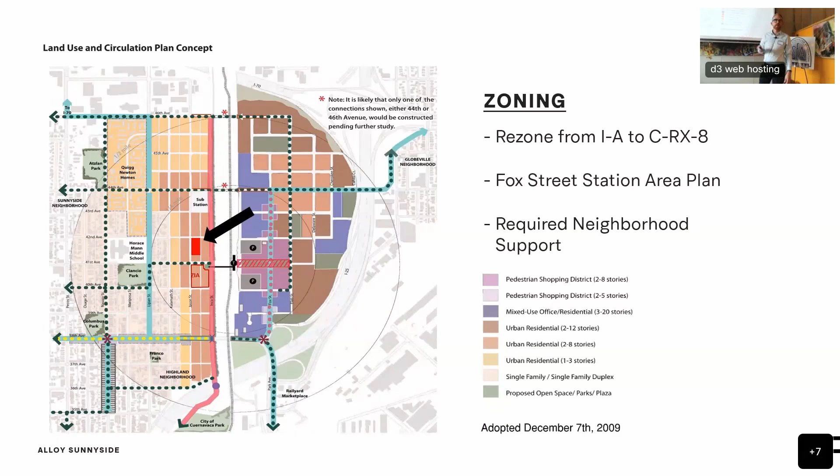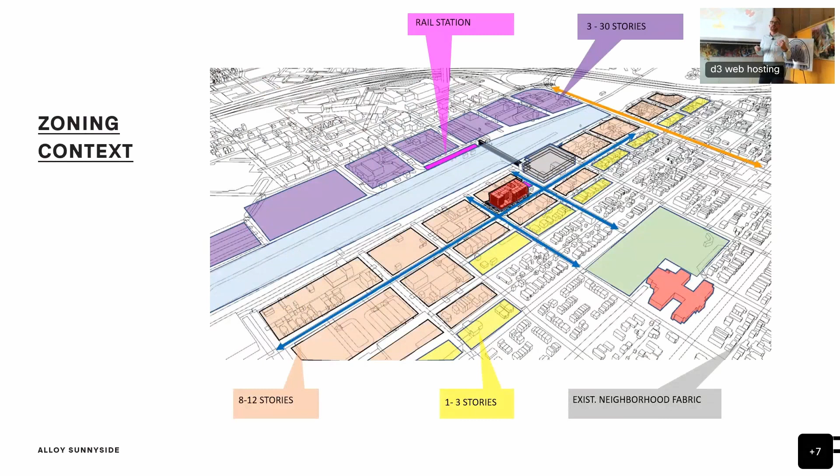This area hasn't been zoned, so each project has to be rezoned, and to be rezoned, they have to get the support of the community. I don't know if you were part of the community organization at that time, but we met with the community and heard what their concerns were about the location.

One of the primary things the community was really interested in was the connection to the commuter rail stop and providing a safe streetscape and paths to that location. They were also concerned about transportation, the amount of cars these buildings would bring to the site, and I'll touch on that in a moment.

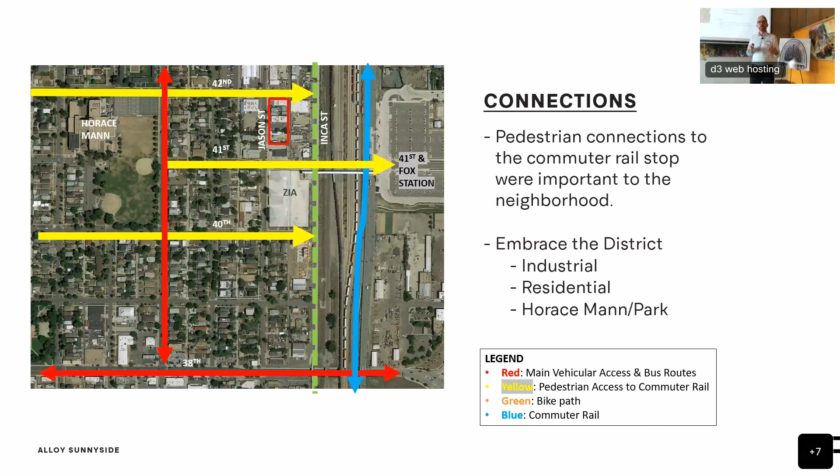They were also concerned that it would fit within the character of the neighborhood. As you can see, a lot of it is single family homes, so it's hard to match that, but there are industrial zones further north and along the tracks, so we looked at ways we could pick up some of those characteristics.

In the project, we pointed out that we can't affect the rest of the street, but we have this part of the block that we can actually influence.

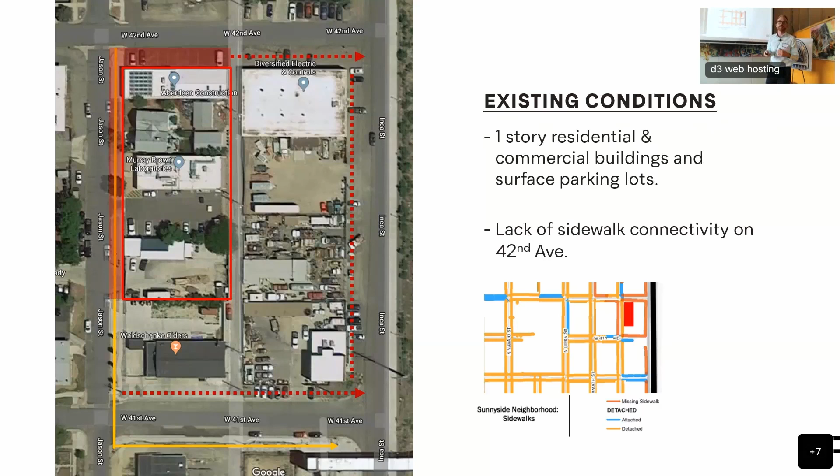Before I get into that, the client came to us with this program saying they want to do a mixed use multifamily building somewhere around 209 units, and they want it to include retail space.

Part of the community organization really wanted to create a sort of main street, not just all residential buildings. They wanted small shops, mom and pop restaurants, things like that. So Prime West was looking at how they could incorporate that into the building to be responsive to the neighborhood.

Another aspect of that responsibility is the 10% affordability. A lot of these multifamily housing projects, I think the laws have changed a bit now, you used to either pay an affordable housing fee or actually build the affordable housing. Our client went above and beyond. They technically could have only built maybe 2% affordable housing, but they wanted the support of the neighborhood, so they incorporated 10% affordable housing to be able to get the density and height they were petitioning the neighborhood for.

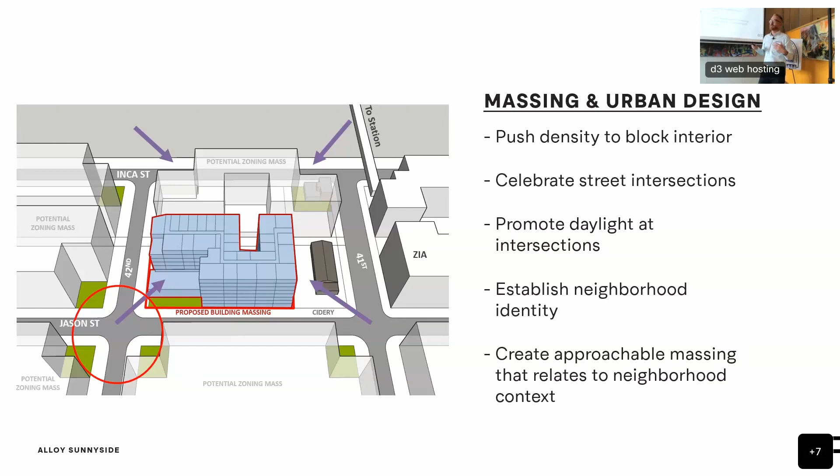We looked at the cidery next door that's not going to be redeveloped for probably another 10 years, so we thought, what if we pulled back from this corner and pushed the mass of the building more towards the middle of the site, providing some better breathing room to create potential for a different neighborhood characteristic as this area redevelops.

Part of that was to allow daylight to get to that streetscape, creating a more pleasant, safe environment for people as they moved along the street to the commuter rail stop.

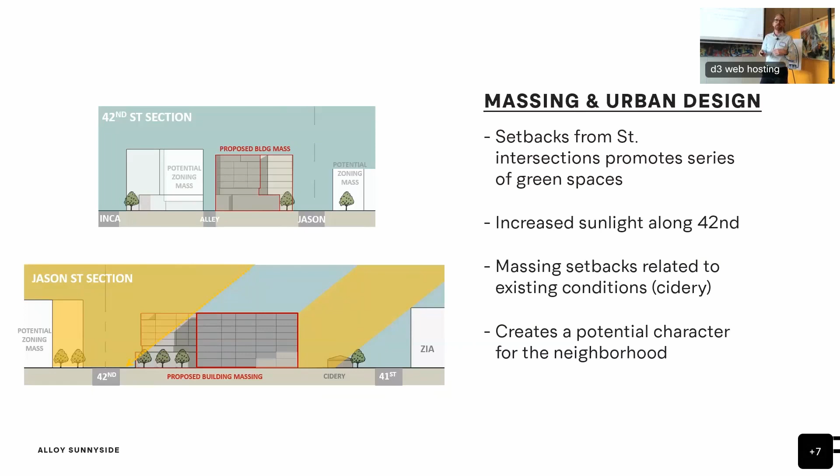And then also just looking at how does this massing start to affect the character of what's developed in this area. And then we went around the neighborhood, looked at what are the kind of defining characteristics of Sunnyside and how do we start to incorporate that into the building. And then just also materiality.

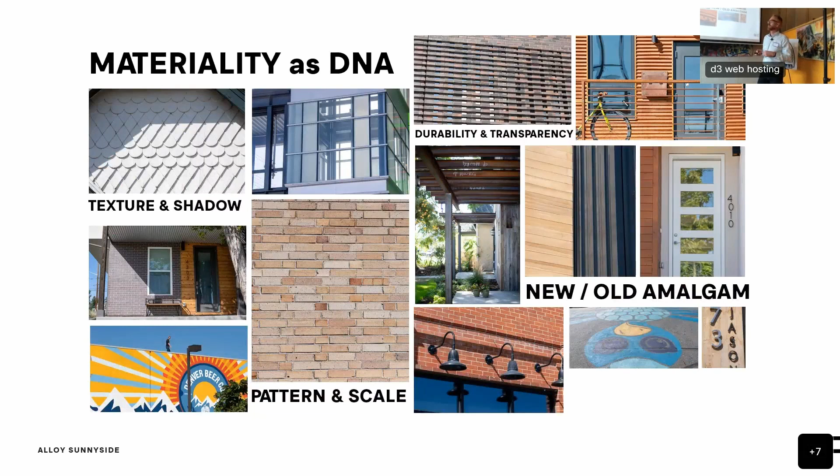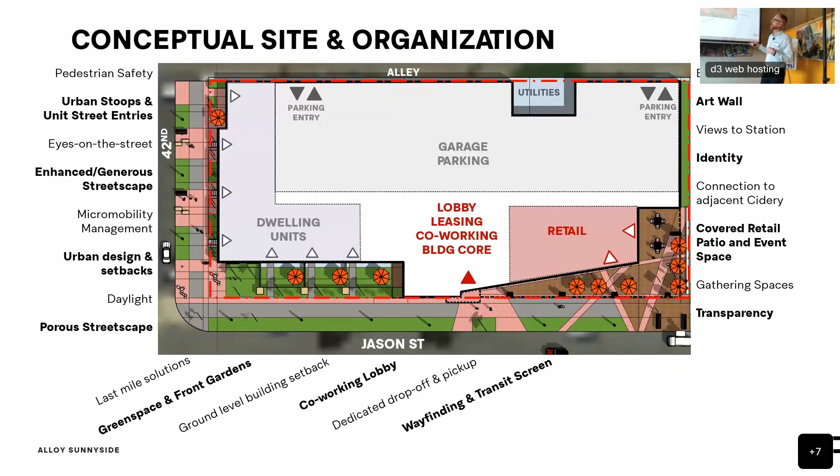We looked at incorporating the retail on this corner, so there is a kind of synergy with the cidery that was next door, and visibility to the light rail, pedestrian bridge and overpass. And then incorporating residential units on the ground floor that would have stoops and interface with that streetscape to put eyes on the street, make it more safe for pedestrians as they're navigating through the site. And then pushing the main building entrance more towards the middle of the block.

And so this was the initial kind of conceptual design for the building. You'll notice the very flat site at this stage of the project, and that'll be a key aspect of the structure of the building and how that played out long term. But then the ground level here was picking up cues from the elementary school Horace Mann down the street, and then trying to pick up some aspects of the industrial nature of the area and incorporate that brick.

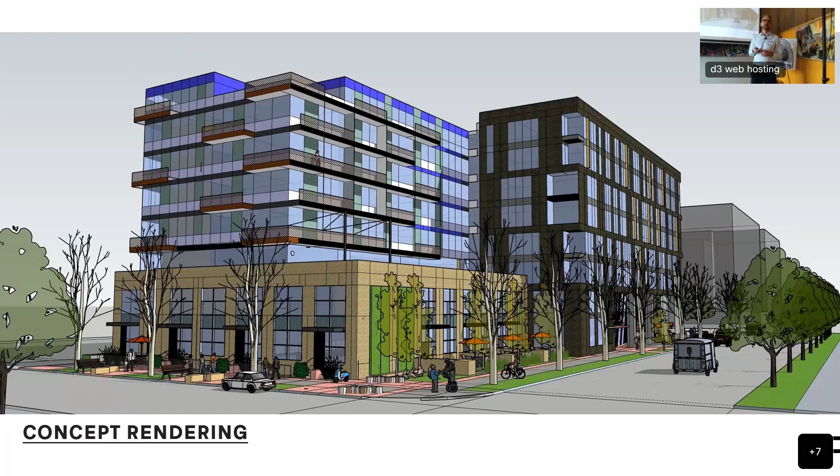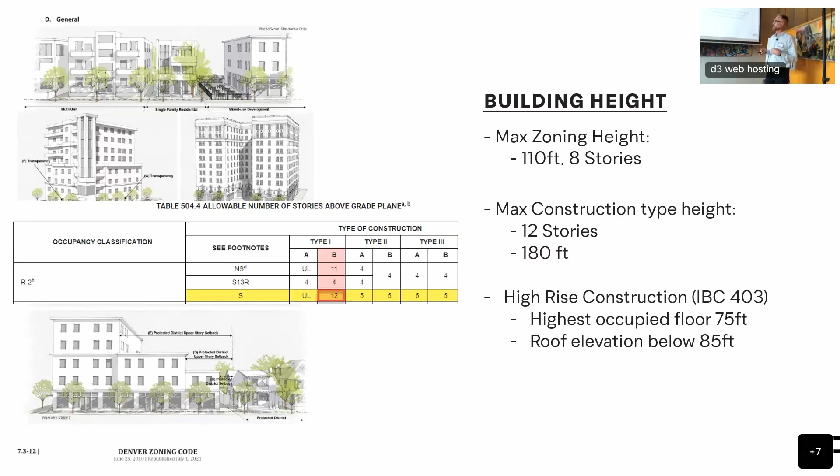And so looking at that program, we started going through the zoning. They wanted it rezoned to CRX 8, which allows 110 feet height and up to 8 stories. When you get into the actual code, that doesn't quite translate. And so we went under the type 1B construction because that gave us the height that we could build that 8-story building that we were initially looking at. And then looking at the construction type, the allowable feet above grade plane.

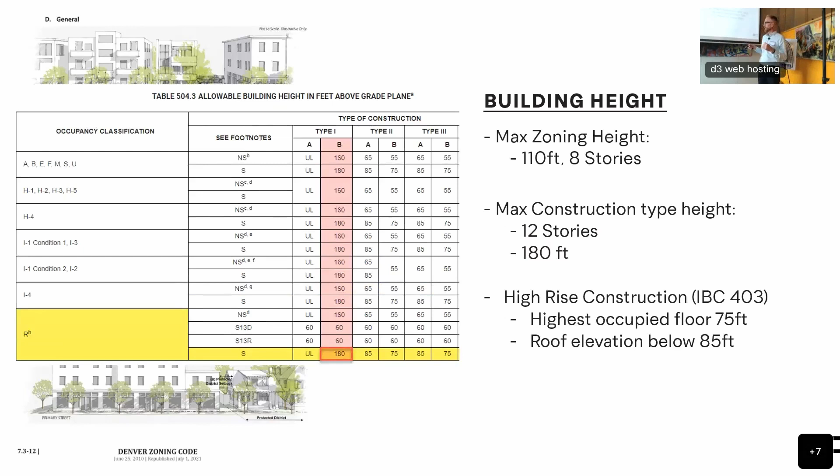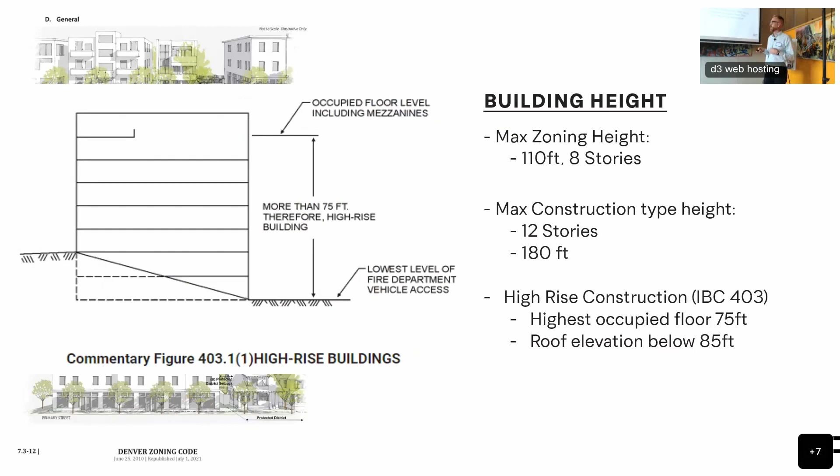And so there was that aspect, but then as we started digging into it, there was also this concern about, well, we don't really want to go to high rise because that triggers a bunch of other aspects that were going to be difficult to accommodate on the site. And so remember this diagram because that'll come into play here in a second.

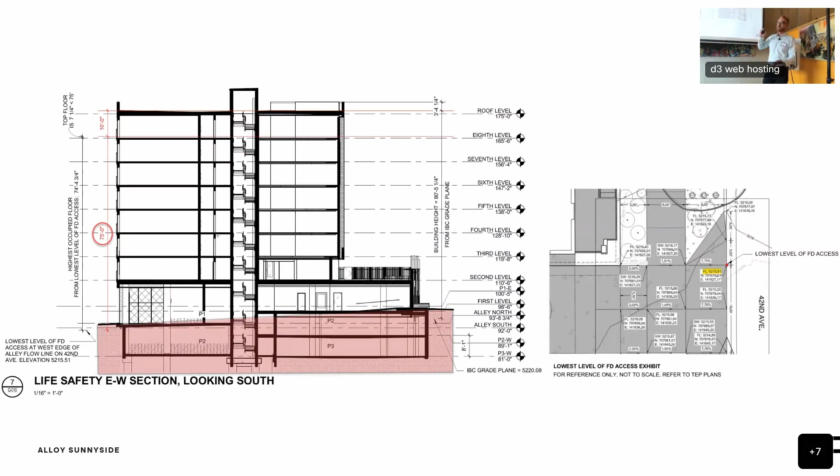So as we started designing and got the survey info, we realized there's about 10 feet of fall from Jason Street to the alley. When you look at fire code, the building becomes measured from the lowest point of fire department access, and so that was from the alley. And so we essentially lost a floor of the building. And what that ended up doing was pushing the building down and tightening the floor to floor.

Let me back up here for a second. We looked at going to high rise, but you have to have access to 2 separate water mains. And then you have to incorporate pressurization, elevator lobbies, fire command control center. And because we're already squeezing the building so much, there just wasn't that space in the project to allow the pro forma to kind of eat up that square footage.

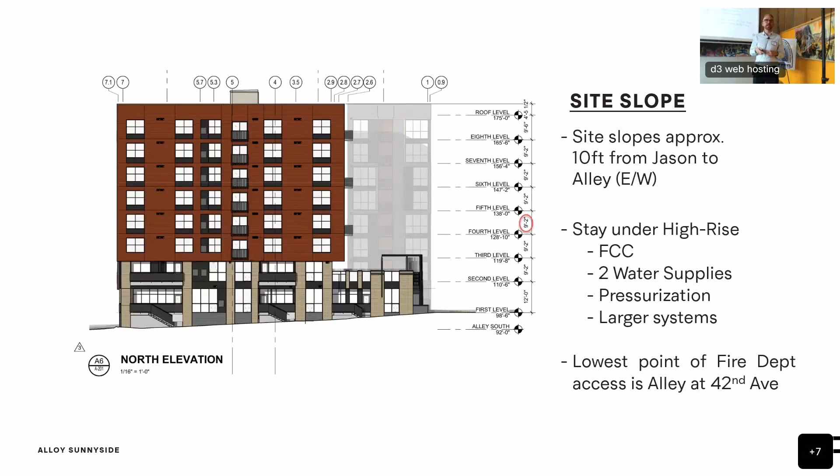Another aspect that was pushing on the building from the other direction was the below grade conditions. So as we were working through the design in concert with Catamount, they were pointing out, hey, there's a lot of bedrock there. It falls off on the south end of the site. It'd be great if you could flip your parking garage, get the deeper end on that side, and try to get out of the bedrock as much as possible.

And then also you see there's groundwater here, and we had to incorporate an under drain system, which if you had to deal with that on any project like this, a lot of different things come into play with those under drain systems, where if you pump that outside or daylight it, then you have to treat it, all sorts of things according to the health department. And because water in this area will most likely have some arsenic in it and different things like that, it was almost a given that we'd have to treat it.

In this case, however, because the ground bedrock fell off on that south end of the building, we're able to incorporate an under drain system that would capture any water coming from the north end that was a higher elevation and run it kind of around the building to this point to a dry well and release it back underground. And so then we wouldn't have to treat it. And then Lauren can touch on a little bit of how that affected some of the structural design for that bottom slab there.

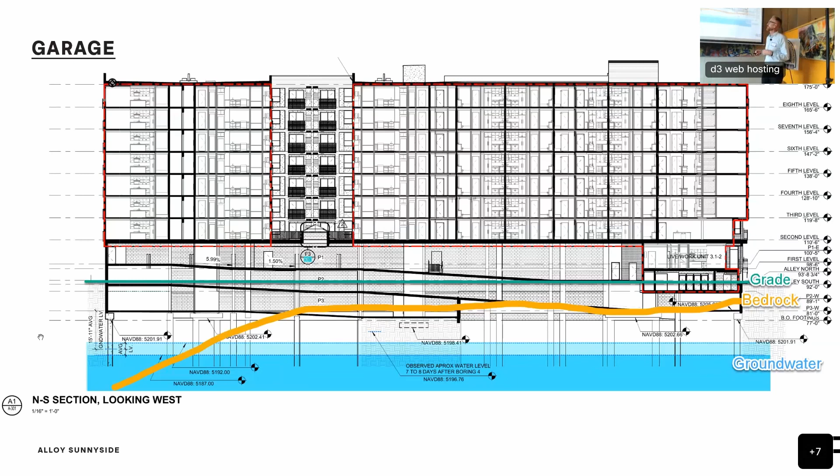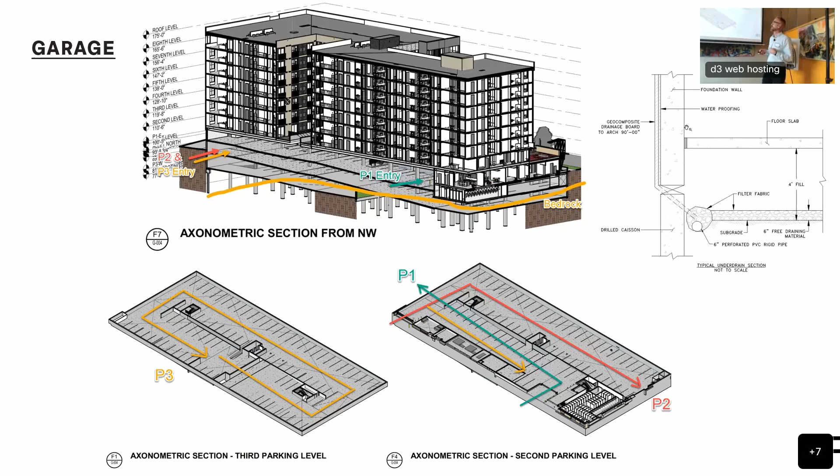Another challenging aspect, because we had to flip that garage, we ended up getting a very complicated parking plate. And so you'll see this on the site tour. On the north end of the site, there's an entrance to kind of the upper level parking that dead ends. On the south side of the site, there's another entrance that goes to a dead end second level, and then another leg that comes down and deeper to the lowest level of the parking deck there. We joked navigating the site that it ends up starting to feel a little bit like MC Escher's staircase down there.

I did drop in this diagram here of that under drain system and how we're picking up any sort of flows of groundwater that come against that parking garage wall, capturing that, running it down to that under drain system, and then again to that dry well at the corner of the site.

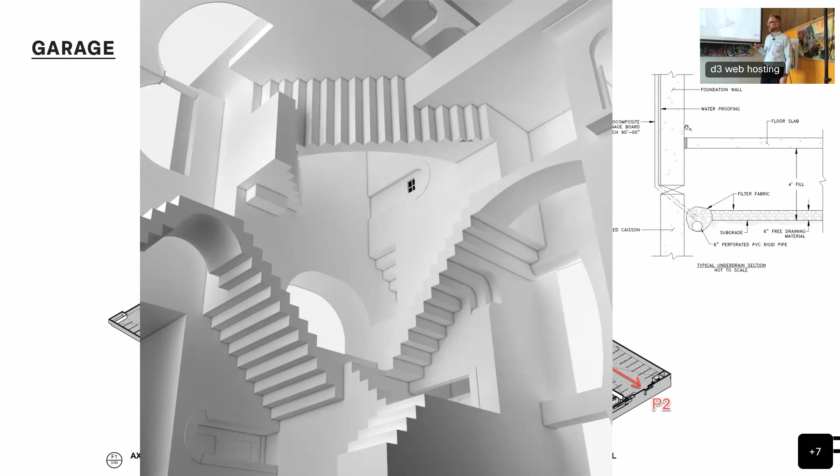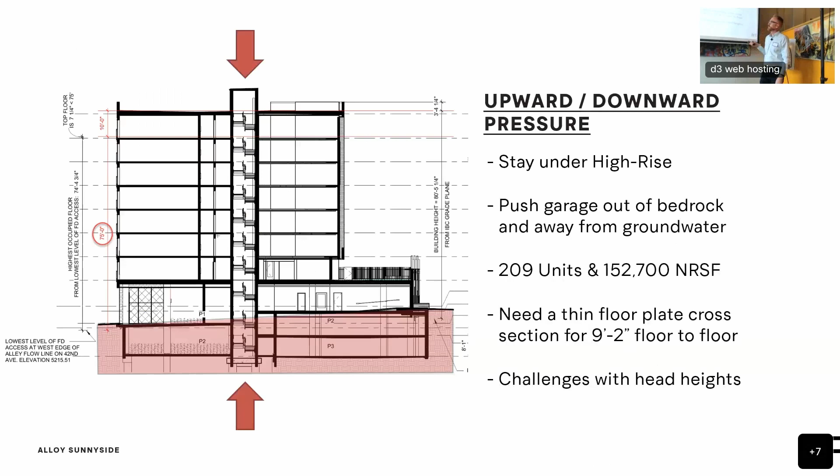So we had these two pressures pushing on that building, and that really started to tighten that floor to floor. We ended up with a floor to floor of 9 foot 2 inches. And so then that started really locking in what sort of structural system we could use for these decks in the building. And so here's a cross section of that. It's a 5.5 inch Infinity floor. It's an Epicore deck. Lauren can get into maybe more of the specifics of that. And then we had to do a bunch of acoustical components to this to keep that cross section just as thin as possible. And so these units end up with 8.5 foot tall ceilings.

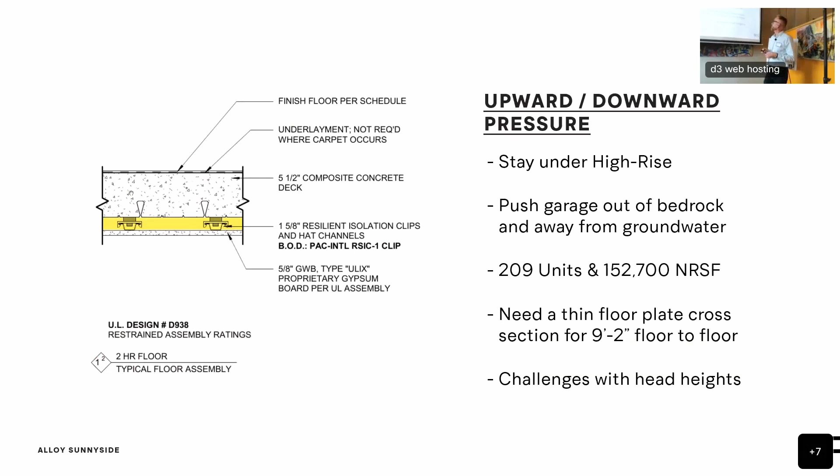A few other interesting aspects of this type of construction, if you're not aware, because we're in the 1B category, that means our structure has to be rated 2 hours. One thing that if you work with architects doing this type of construction, they're probably always hounding you on, okay, what is the primary structural frame? Because as an architect, I have to rate that individually from the wall. So if you have a column in a 2-hour wall, I still have to rate that column separately in a 2-hour configuration.

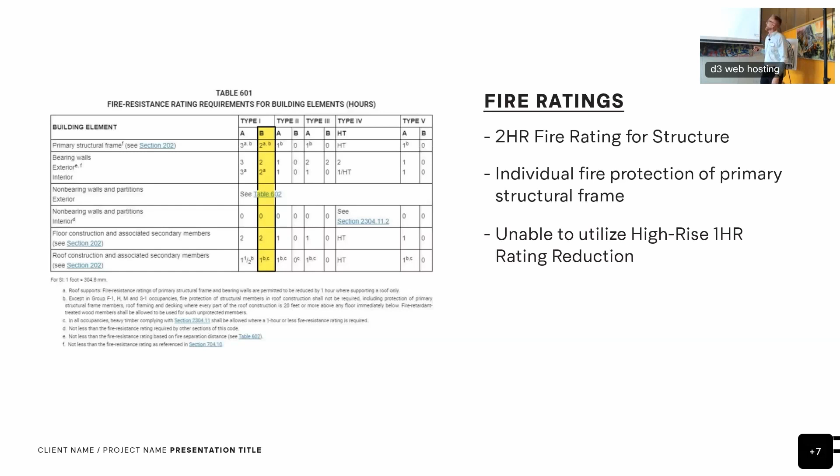Because we weren't high rise in a lot of these Infinity type buildings, you can get a reduction to drop down to type 2 or 2A construction. So then all your ratings are 1 hour. It becomes a little bit easier. With the 2-hour, well, let me back up just a second. So here you can kind of see some of the configuration. And so we get all the load bearing, these light gauge metal stud panelized system. These walls are what is the load bearing structure of the building.

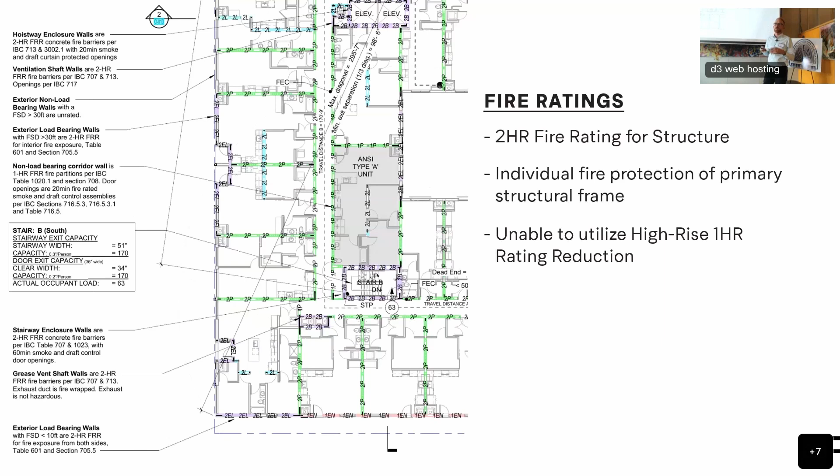We do have some conditions where, like at balcony locations, especially on the north end of the building, you'll see we had to incorporate a lot of steel columns just to get some of the building configuration that we were wanting to achieve there. But here you can see the 2-hour ratings for those load-bearing walls, and then the non-load-bearing walls within the units. There are some locations where there are load-bearing walls inside that unit, and so there gets to be some complicated UL assemblies and ratings.

One aspect on the exterior walls, also because we're building to the property lines of the site, you end up with different conditions where, like on the south side of the building, because you're so close to the property line, you have to rate that exterior wall that's load bearing 2 hours from both directions. And that equated to 2 layers of sheathing on the exterior. Other locations just had 1 layer.

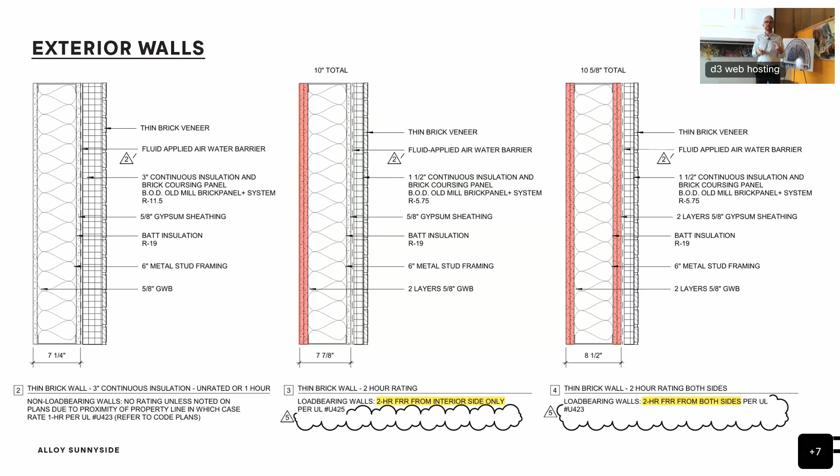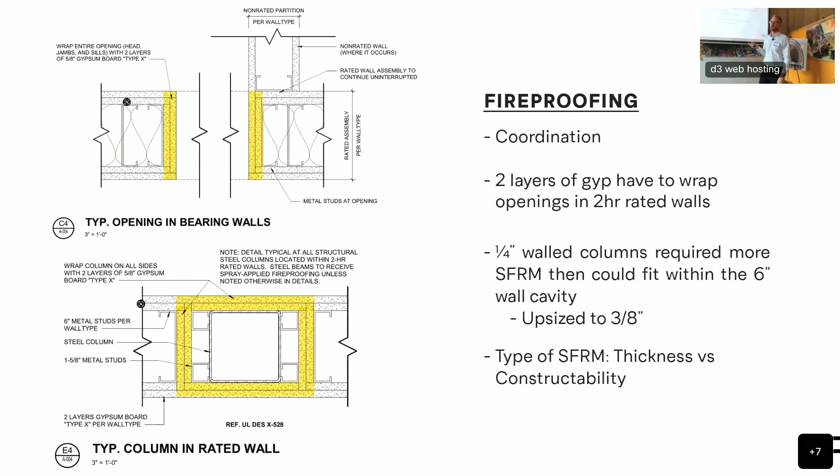And so it ends up being this coordination thing between the structural engineer, where that slab edge is, the shops, and the GC. There's a lot of things to be aware of as you go through that. And then again, that kind of condition where you have any primary structure, it has to be 2-hour rated. And so if this was occurring in a wall, then we have to either spray fireproof that if the column is small enough within that wall cavity, or if it's larger, then we could incorporate a gyp wrap around that.

And then just real briefly, this is the current configuration of the building. You'll see this as we get out there. This is 42nd, and then this is Jason. All the amenity space for the building, the leasing operations, co-working, the retail bay at the corner of the building, and then live work units along the street on the north side.

And then at the upper levels, this is the typical floor plate. It's pretty much all 2 bedrooms, 1 bedrooms, and some studios. We do have 3 bedrooms. There's one on the 2nd floor, and then the ground level, all those units are 3 bedrooms as well. And the building configuration is that kind of S shape. And so this is where we step back from the corner. That's where we get some interesting things you'll see in the podium out there as well, related to getting a pool hovering above a unit with a spa.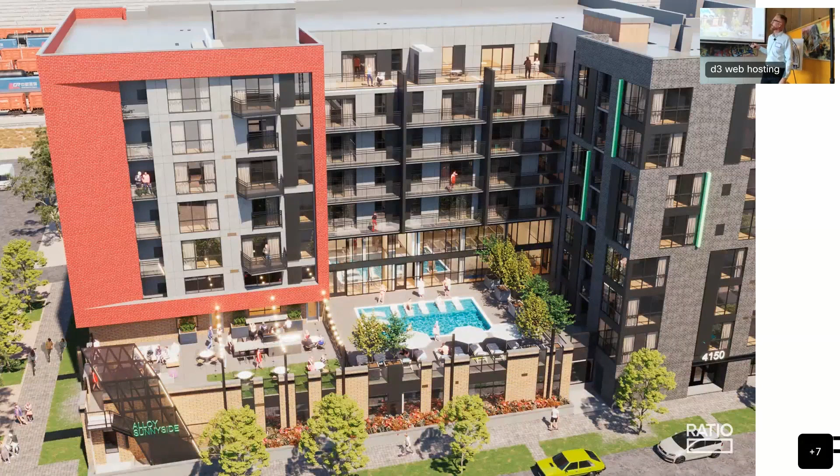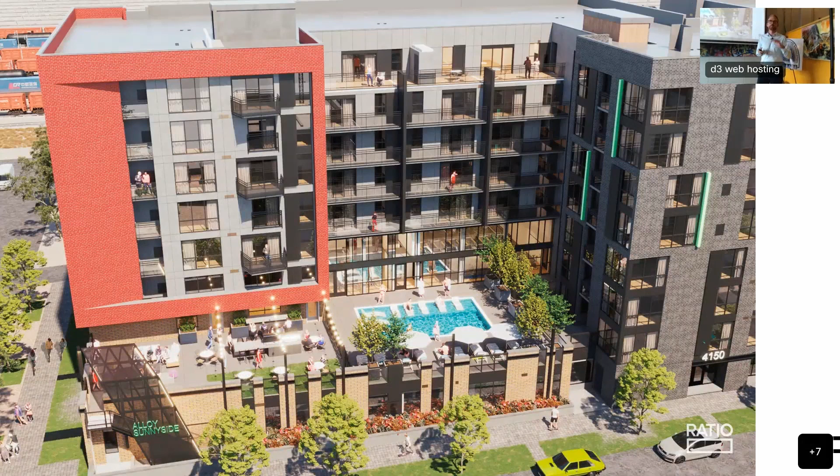You'll see we've got some exterior lighting that will be incorporated on the building. Looking at that pool deck here, you can see kind of that configuration of what that ultimately will look like. The units up here, we have a continuous balcony along those faces there. And I don't know if we should be able to see some of the form work on the underside of that, where we incorporated a drip edge to make sure that that water's not running back to the building, and create a place to stop the traffic coating to ultimately protect the rebar and stuff in these slabs.

Then one last image. This is the cidery. You have a double height retail space on the end. A little fun tidbit with the fire code, you can only have so much open area, and so we had to work with the design to limit how much opening we had to the south of the building. So with that, I will pass it over to Lauren.

All right, can you hear me? I'm Lauren. I'm with IMEG. I'm the structural engineer on the project. And for those of you familiar, this is the RAM model for our project if you use RAM structural systems software.

One of the things that we did with this building was actually fully model the structure to be able to get the design loads at the podium level, at this level. And here's the pool Eric was talking about. There's some amenity space indoors here. There's the double height entry lobby and retail that Eric was talking about. And then hard to tell from this, but this is the end where those ground level units are, and the site is sloping as you go from Jason back to the alley.

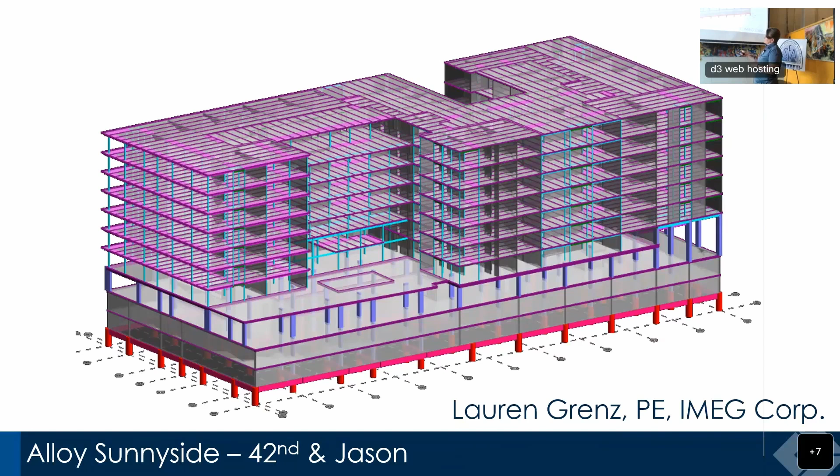So just the systems in the building, because of that building height and the short floor to floor, we're using an MSR deck and what's commonly known as an Epicore system or an Infinity system. If you've heard of Infinity, they provide load-bearing metal stud walls that are panelized. So we were able to keep the structural depth at the upper levels between 5.5 and 7 inches in almost every location. So our total structure depth was this deep throughout the upper levels. That really allowed them to give space to get the other items that they needed into the units and to get that acoustical component.

Below that, we had a podium slab, and that's mildly reinforced, and a level 1 slab at the street level that's also mildly reinforced. Part of the reason for the mild slab rather than post-tensioned was some of the street sloping and the stepping in and out of the building at that ground level. So we needed flexibility at the first level to make any steps occur, add anything for ramps and pavement and things like that. I'll highlight that in our plan a little bit later.

We were able to use post-tension slabs at the garage, which turned out to be a 7-inch structure depth as well. Again, that helped us keep that bottom level up. We weren't at this deep of a structure depth throughout the garage levels.

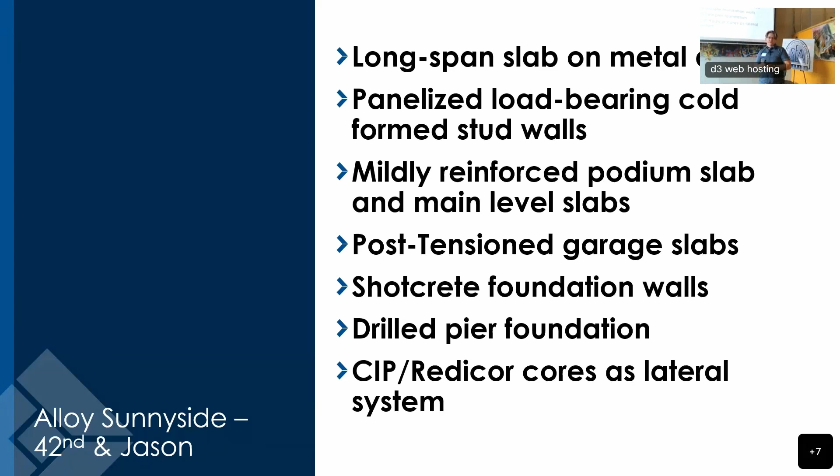Here's some pictures of the structural system. One of the benefits of the Infinity style system is that Infinity panelizes everything. So most of the construction of the structure, once you get up above the podium level, is all panelized. They just drop it into place, attach it, go to the next one. Drop it into place, attach it. That helps your construction schedule as well.

Here's a picture at one of the stair cores. You can see the metal deck coming in, attaching to the Redicor system, and then a little bit of structural steel in this particular location to get that bearing line right at that core line. Here's a view of the front edge that Eric was talking about, at the back by the tower crane, overlooking where that big skylight would be that Eric mentioned.

This is what the metal deck looks like. You'll notice that it's a very tall profile, about a 2-inch profile. At every bearing line, they crimp it down. What that does is help the concrete provide an interlock right at that location so that your metal deck at the bearing line doesn't try to separate from the concrete.

And then one final structural piece is you have something called slab beams in this type of a system. Again, that's a 5.5 to 7-inch beam that acts as a bearing line where you don't have bearing walls in the units or where you have some kind of a transfer happening.

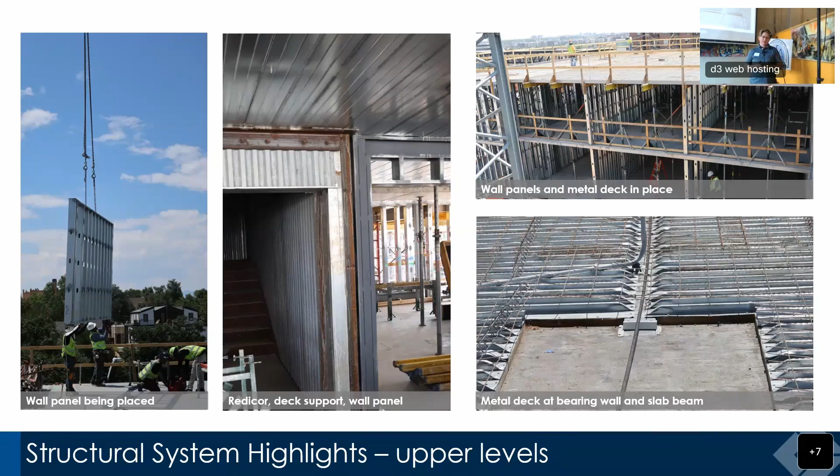So this is our typical upper level floor plan. You can see that the structural lines are very simple. This is the demising walls. We're able to clear span across the unit. I think the widest unit was probably around 21 feet, and we're still able to do that with that 5.5-inch profile. As you come around the building, these are the slab beams that I was talking about.

So we have metal deck spanning in this direction, and we had a structural steel column here that goes to an Infinity panel here, and a slab beam in the middle of that unit. I think it happens that there's a kitchen or a living room right at that location, so we didn't have a bearing line. And then right at the north end of the building, you can see that almost all the structure is actually that slab beam and column system.

Part of that has to do with the ground level where they have those stoops and they wanted to create a little bit of space along the sidewalk. They actually moved the exterior wall of the building in by about 2.5 feet, which meant that all of our load-bearing walls above would have been outside of the structure on the ground level. So we ended up going with this type of a system with the slab beams instead of the load-bearing walls.

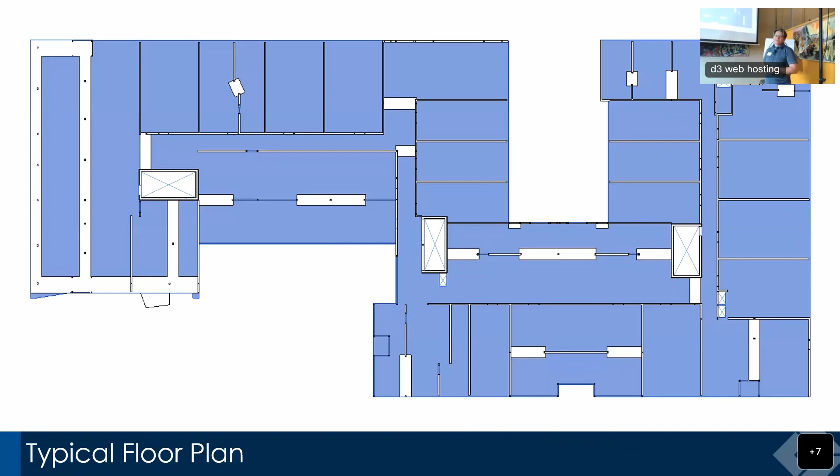Here are some of the typical details from this Infinity style system. Main one: continuous slab on metal deck at a bearing wall.

You can see that they actually stop and start the deck at each bearing wall line. Part of the reason for that is the deck itself is quite heavy and difficult to deal with. If you're trying to do 2 or 3 span continuous with that long of a deck, it would be really difficult to place in the field.

Here's a typical exterior condition. We do have some reinforcing in this system at the top, at the supports, to help get the continuous action that we want to have, to help limit deflection in the units.

And here's a condition where we're turning. This is load bearing on this side and it's parallel on this side. You can see that deck profile that comes in and creates a mechanical interlock between the deck and the concrete slab, which helps to keep that slab from separating from the metal deck.

There were a few select locations where we had structural steel headers at the exterior wall, where we had a very wide window bay. This was challenging because of the fire ratings that Eric was discussing, where we were at the exterior wall of the building on the east side, very close to the property line. So trying to get that primary structural fireproofing around a steel header turned out to be pretty challenging, and I think we're actually still working through that detail under construction.

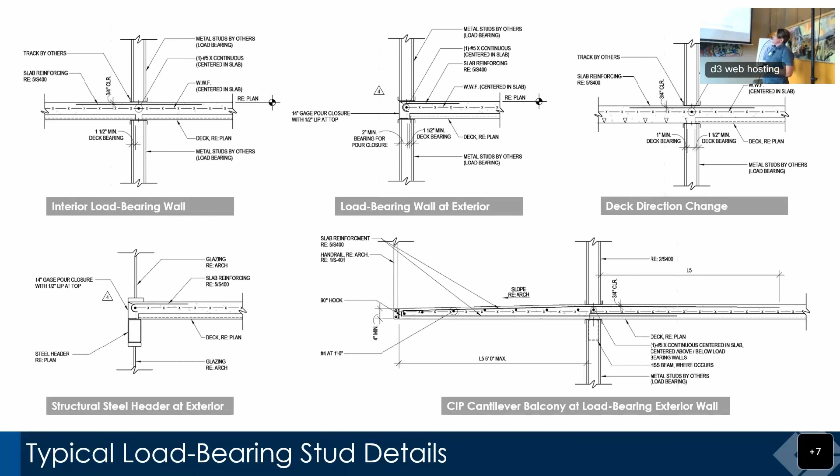So I told you we were going to talk about that north end. Our structural line was all the way back here, and about 2.5 feet out was where the bearing walls would have been. On top of that, our units at level 1, at the ground level, and at level 2 versus the levels above did not align with basically any wall throughout. So our idea of using structural bearing walls was just thrown out the window.

We ended up with structural steel columns that we designed and these slab beams. These beams ended up being about 7 inches deep, which is still pretty good structure depth, but there were some challenges as far as locating the columns and getting that fireproofing fit in the assemblies.

Here are some of the details. The slab beams look like this, where you have a short span. You could actually match the slab on metal deck profile, so you have a flat soffit. At some of the longer spans, you end up with a little bit deeper section, and so that would be like this beam here, where we had a total structure depth in this case of 7 inches.

And then in our case, we also had this kind of torsional case at the edges, where we still have a bearing wall, we have the facade, we have all the weight of that right out at the outside face of the beam. So we ended up with a little bit unusual detail for this case with ties. And if you can imagine trying to fabricate ties within a 7-inch beam, it was a little bit challenging.

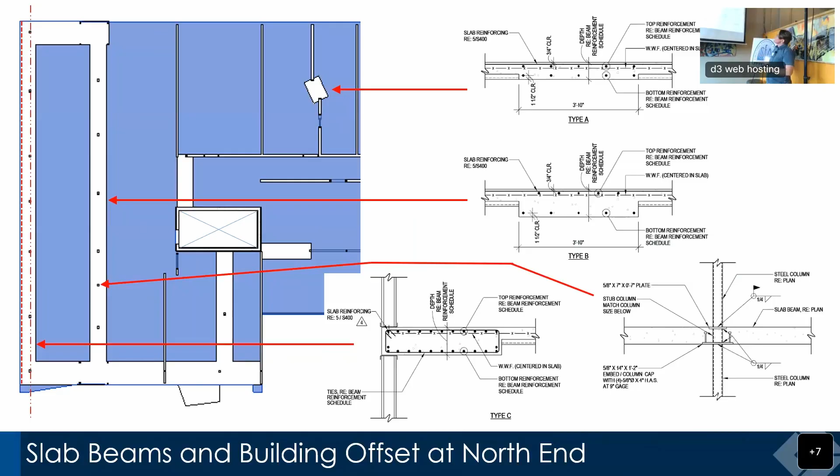At the main level, we ended up with a 12-inch slab, again using mild reinforcing instead of PT because of some of the steps and difficult geometry that we had.

Any of you who have done a podium job might think this 18-inch podium is pretty excessive. Often wood jobs with a podium end up around 12 or 14 inches of slab, but you have to remember that the structure weight with a slab on metal deck for 8 levels is a lot heavier than a wood building. So our podium slab ended up quite a lot thicker than you'd expect.

And finally, we ended up using CMU crash walls around the garage spaces.

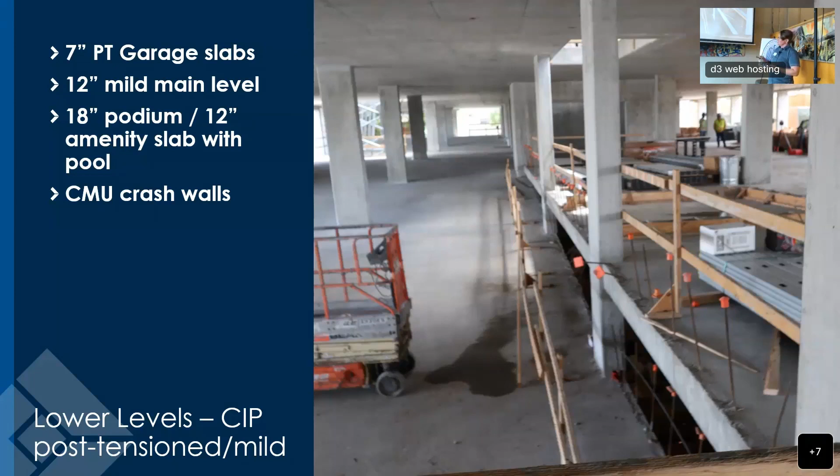The dead load is very high, and we had quite a lot of uses on the main level. The other piece is not only does the street slope at the north side, it slopes at the east and west sides as well, so there are some interesting spaces along the alley side. We're also placing the transformer and related equipment on an elevated slab in the garage, which has its own set of challenges.

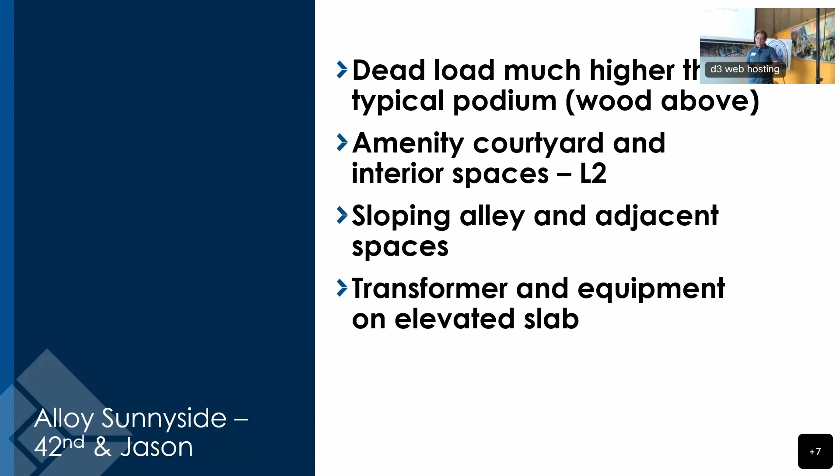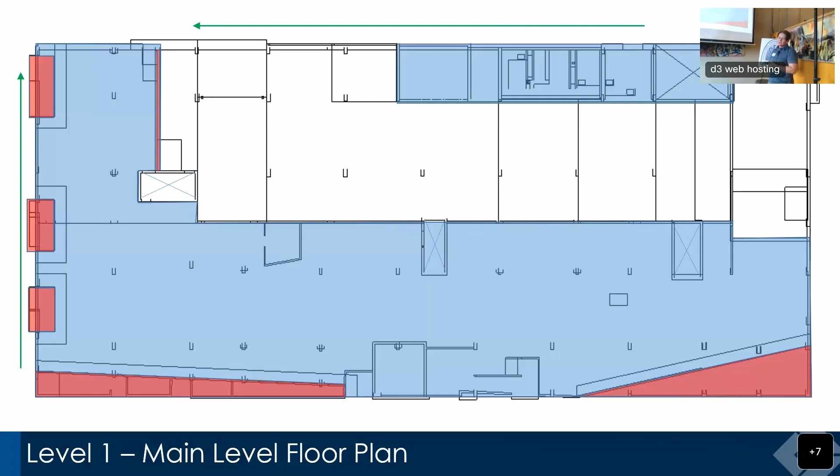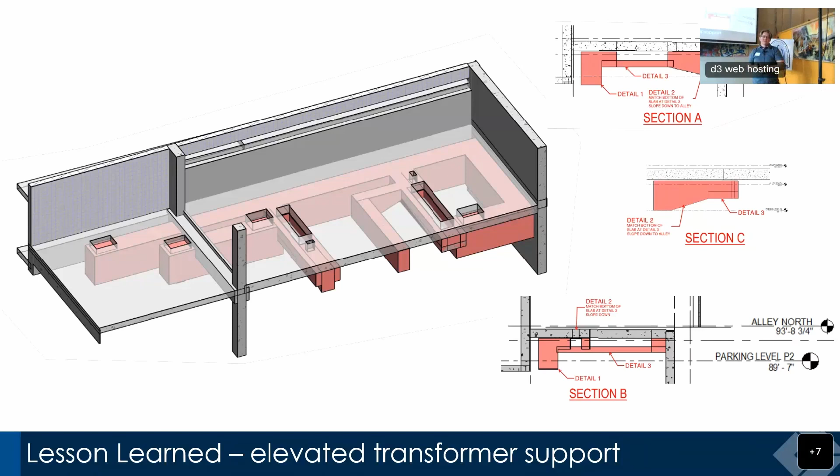In hindsight, what I would have done is create a lower slab, fill it with dirt—they can put the conduit wherever they want to, they can bust some holes in my structure up here, and I think it would have been easier for everybody. But we're going to take a look at that when we go on the site. You can see this kind of maze of red concrete up above the P2 parking area.

I think that's it for me, and I'll give it to Rodrigo.

Hello. So my name is Rodrigo, I'm with the general contractor, Catamount Constructors.

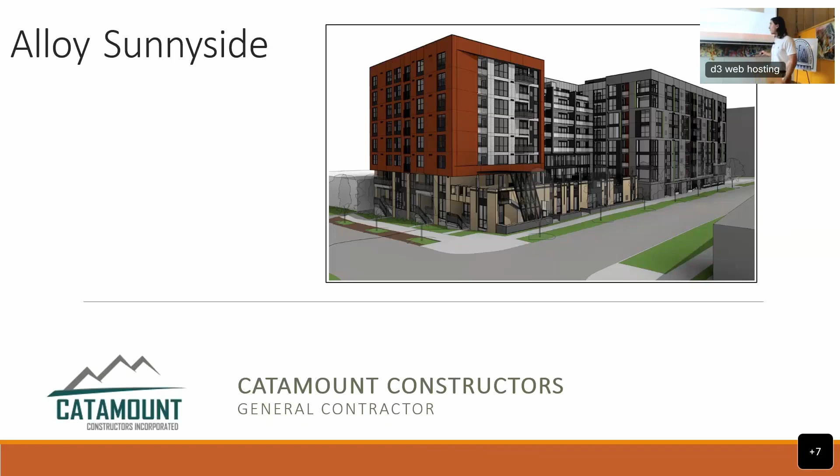A little bit about the general contractor's role throughout this process—we like to get involved before construction starts. We like to think we're a pretty good resource for the owners, architects, and engineers, just to loop us in once the design starts getting finalized, letting us look at it to see if any huge red flags come up. So we like to be part of that before we start digging.

And then going down to construction schedule, our biggest thing is just to get the building done and ready as fast as possible. We know our clients want to get people moved in as quickly as possible.

Bringing me to the first part, the Infinity System, which my team has never done before.

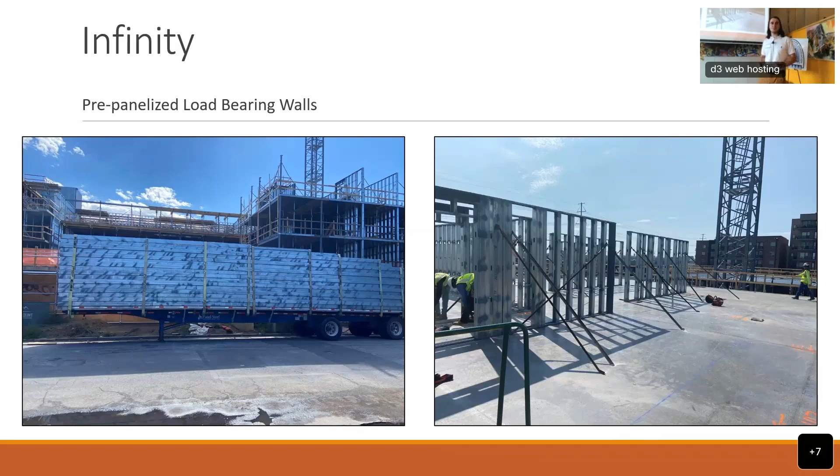One thing to notice is these chases are the MEP chases. Once this hits site, it's kind of putting the pieces together, but there is a lot of coordination that goes into this. Before we even started digging, we had over 100 RFIs from Infinity alone, and Lauren and the IMEG team were really helpful answering those questions so they could manufacture all these panels correctly. So we're avoiding having to do any field modifications. Once we get it all coordinated, it comes out, and everything in hindsight should work. That's really helpful when it comes out.

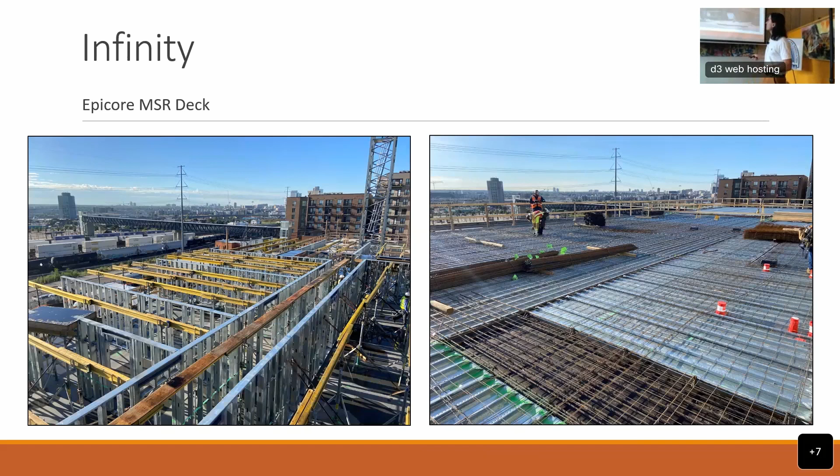One of the things we've been working through the kinks on, this being our first time, is where we're currently at right now. We just poured the 5th level, and we thought we'd be able to get in on the 2nd level and start doing some of the light gauge framing and layout, stocking material, but you need to have 2 floors of reshore underneath it. So once level 5 poured and hit strength, we were then able to go on the 2nd floor and remove all the reshoring. We just didn't think it would be that much, but it's kind of hard to work around. That's just one lesson learned there.

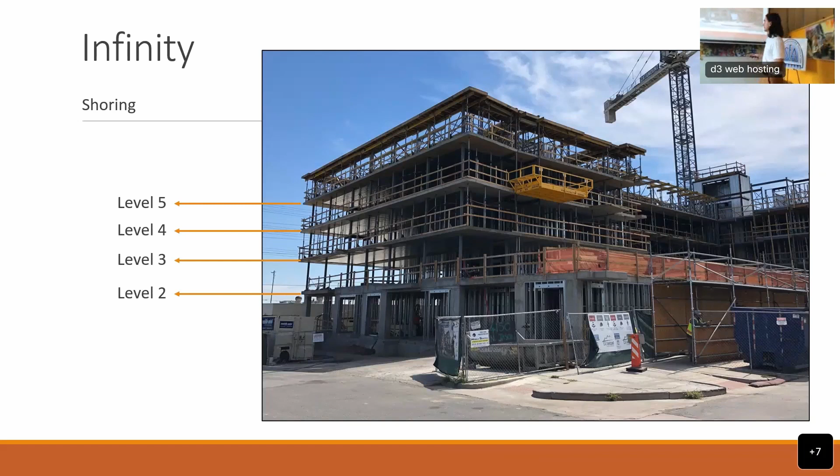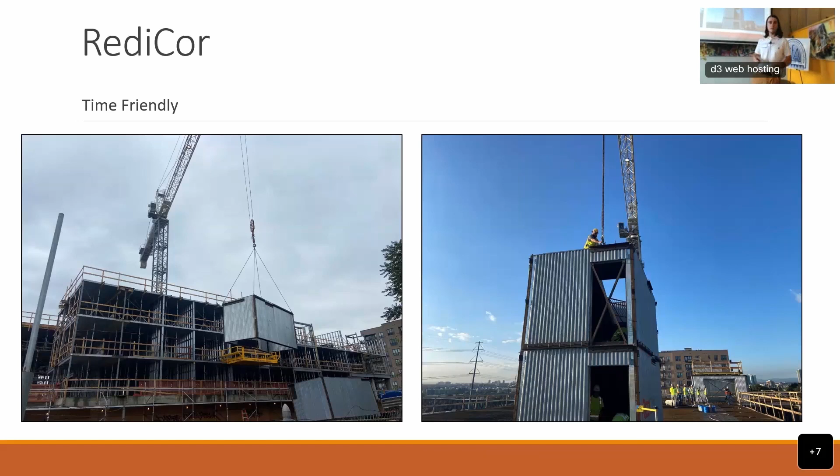Moving on to the RediCor, again, extremely efficient system. As the contractor, we love being able to work up and have the cores go up with the floors as well, it's really helpful. It's kind of the same thing where these roll up in trucks and crane them right out, put them together. Doesn't take more than 30 minutes just to set it in place. We're fortunate to have a site where we can have road closures, but if you have a job downtown with limited space, it's an extremely efficient system — the truck can roll up, you empty it off, and then you're on your way.

Just looking inside, as Lauren had mentioned, it already comes with the rebar, the horizontal, and we just install the vertical. Right here, spaced throughout the cores, running along here, it just kind of sets in place. You screw it on — that's a female threaded rod right there. Set it in place, and then you can pour it.

Pretty much one of the greatest things we've come to realize with these cores is that the stairs already come in them, and that's a huge plus in our industry. In stick frame and wood frame, you have all these ladders everywhere, but the fact that we have 2 stair cores on this project — having 2 stairs as emergency egress is way more beneficial than having those ladders there.

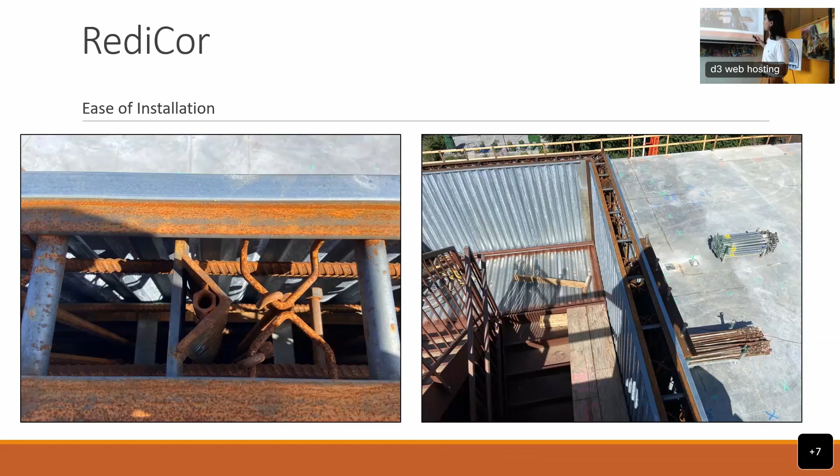Having this platform here already makes it a lot easier to pour the stair cores, but the elevator became a challenge for us because you just have an open shaft. So trying to figure out how to pour when you're on the 8th floor and it's just an open shaft, we had to come up with a solution.

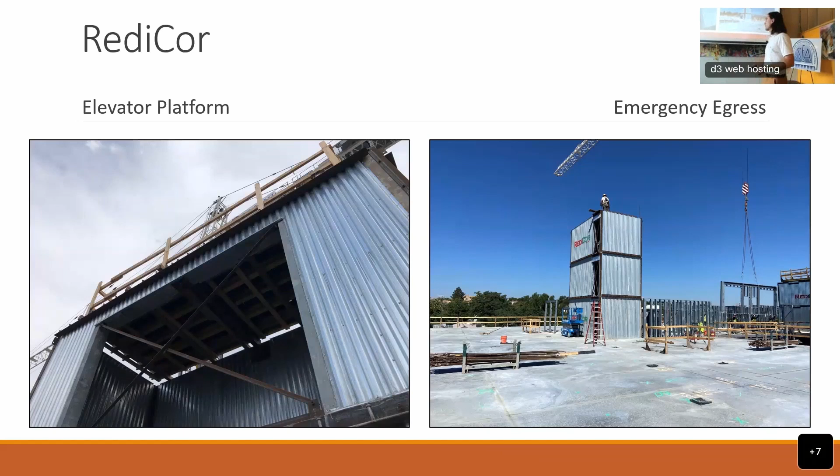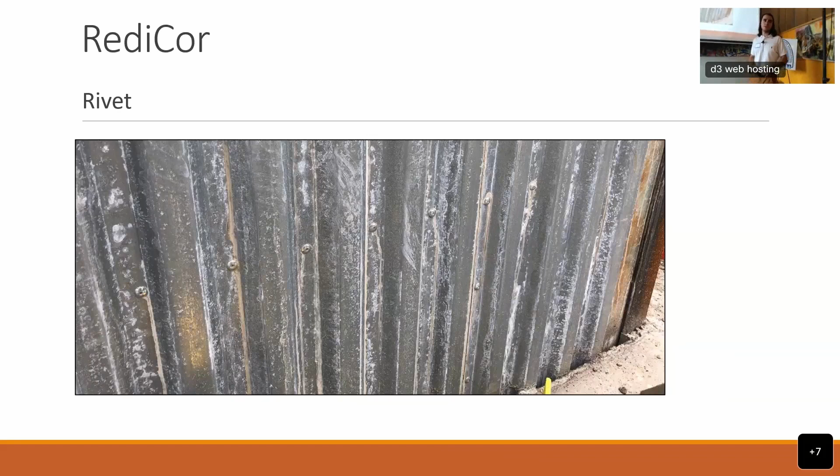This is kind of particular to our project. Our owners wanted some of the sections exposed, and we quickly realized that once you pour and vibrate, some of the concrete leaks through the rivets. So we kind of freaked out there for a second, didn't want concrete on the exposed deck. But that's just one thing to keep in mind if you're designing these with the RediCor, if you do want to keep it exposed. That's just one of the things we had to work through.

Something we're getting into now as we do rough-ins is the MEP coordination within the parking garage itself. I feel like you run into this a lot with height restrictions and needing to have fall on certain plumbing and fire sprinkler. We only have the plumbing right now, and as soon as fire sprinkler goes in, I'm sure there's going to be some coordination that'll have to happen there. Fire sprinkler is a little more stringent. It's always a challenge with the code requirements you need for the height.

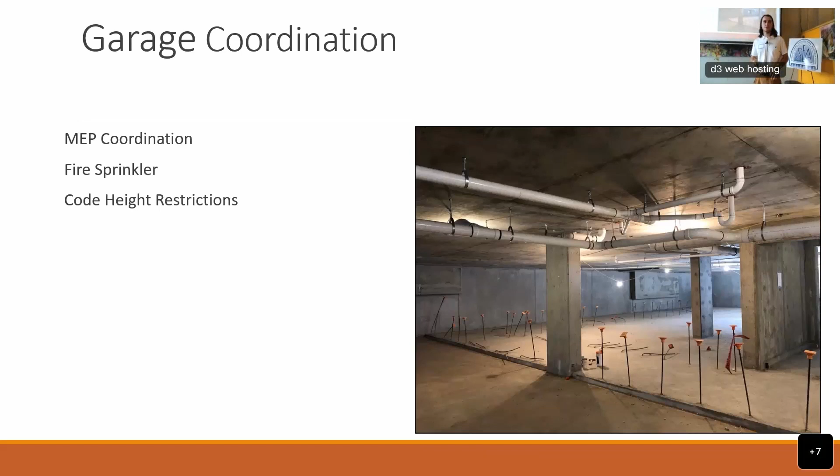As Lauren pointed out, having the PT slabs in the garage levels helped give us a little more room, which is always nice. And then here is underneath the transformer, all that red concrete. We can take a look at it when we're there, but I'd say that's definitely one of our biggest lessons learned on this project - making sure that's coordinated before you get out there. We thought we had enough time to figure it out beforehand, but it started getting to the critical point. So always make sure you know with Xcel what they need and all their requirements.

And then once we go out on site, we'll be able to walk with you guys, and any questions you have while you're out there, we'll be more than welcome to answer them.

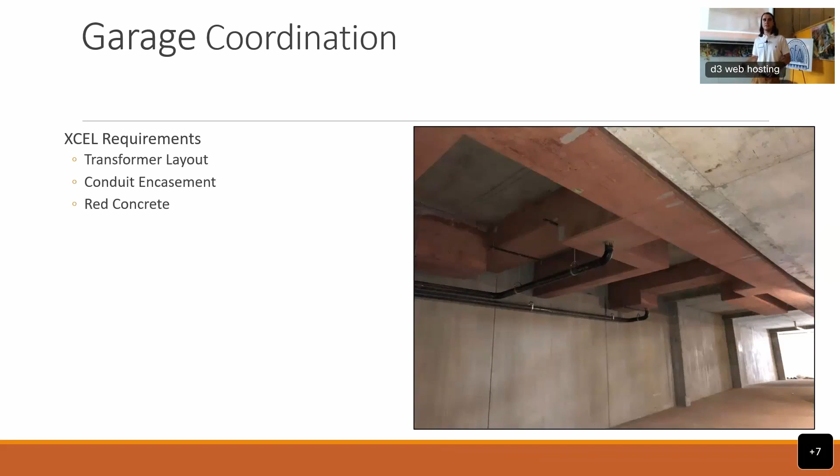It's an XCEL requirement, so people don't drill. For those of us tuning in on the webinar, can you repeat that question? What, for the red concrete? Was there a code requirement for the red concrete?